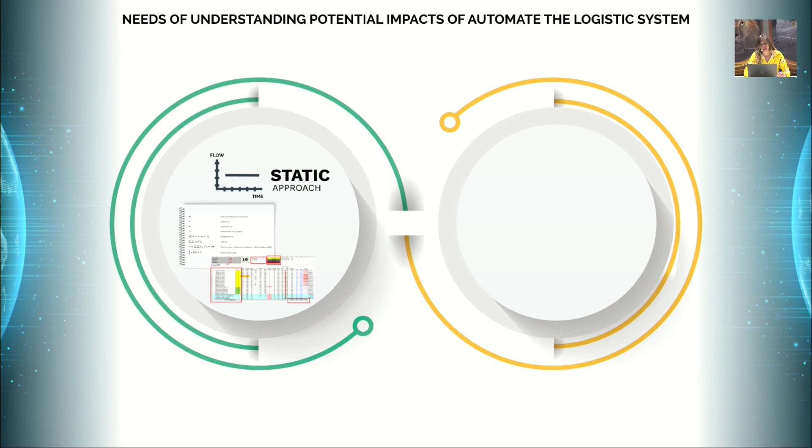When our customers, like you for example, come closer to the automation world, we know that the transition is not a straightforward path. We guide you to understand potential impacts on your logistics system. We base the analysis on historical data together with future forecasts, but the traditional mathematical approach, only based on static input data, may not be enough to gather the complete system behavior. Complex systems require an extra effort - they require to be studied with a flexible tool that highlights the Elettric80 know-how.

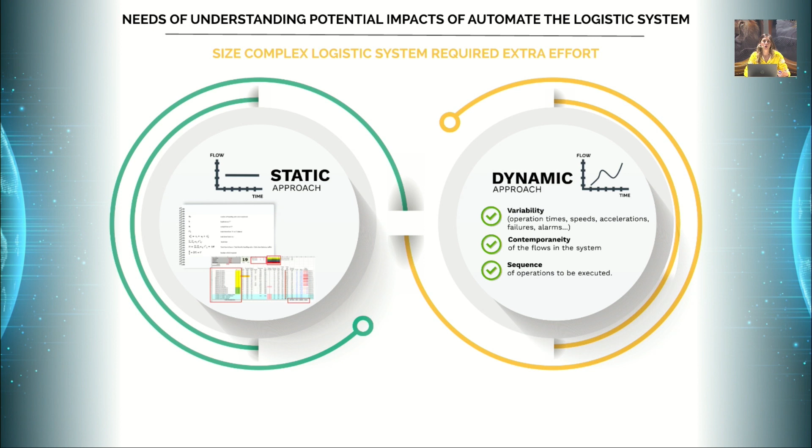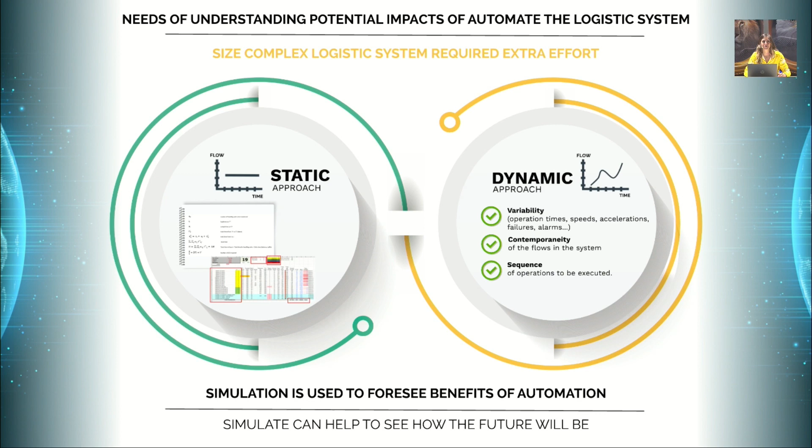This is the reason why we add a dynamic approach, where input data change throughout the simulation time and follow the real trend of the events affected simultaneously. Also, variability and sequence of the events are part of the analysis. The static approach is not intended to be an alternative way of sizing a system - the static inputs are a mandatory step, while the dynamics complement this approach. Through the simulation, we can foresee future benefits and take you through the transition between manual to automated. Simulation can help to see how it will be.

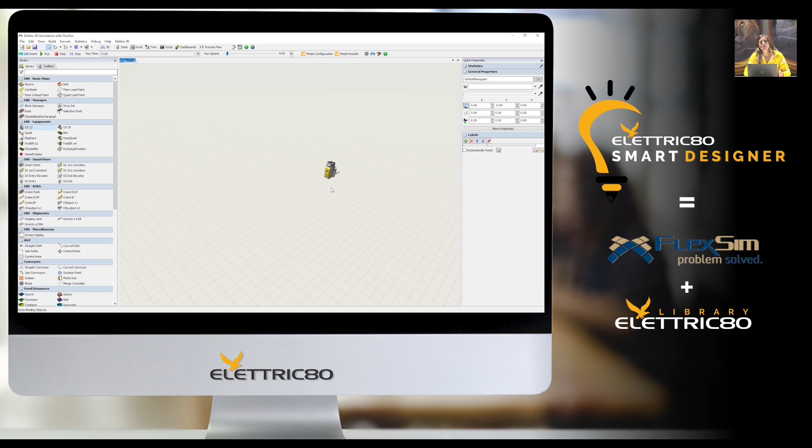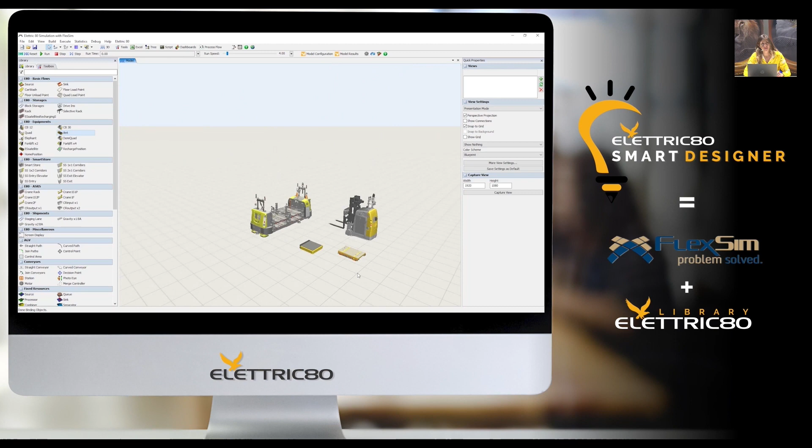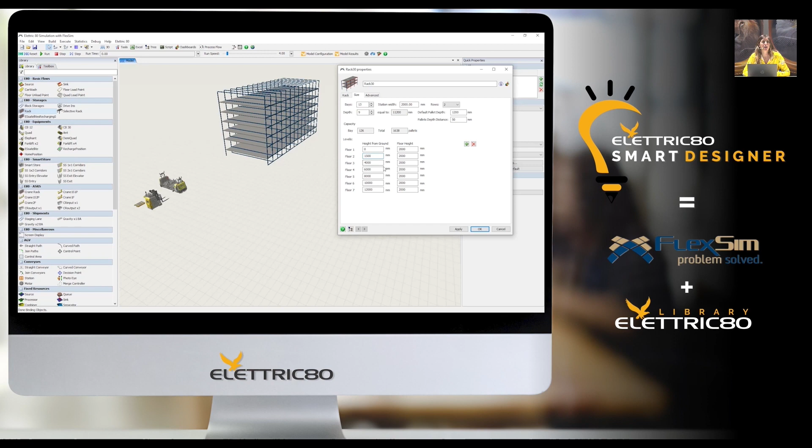This is Smart Designer, and this is the way we decided to call our simulator. Smart Designer includes specific libraries developed by E80 and E80 developers. These libraries function as the software does in the real system and as the system would in the real world. It uses FlexSim as the engine, but all the E80 know-how influences the current behavior. From the library, we can drag and drop objects on the virtual environment. We can import the AutoCAD layout and then place the objects at the real layout physical positions. We can also customize object parameters based on customer requirements through the user-friendly GUI or a custom code to behave as the customer is requiring.

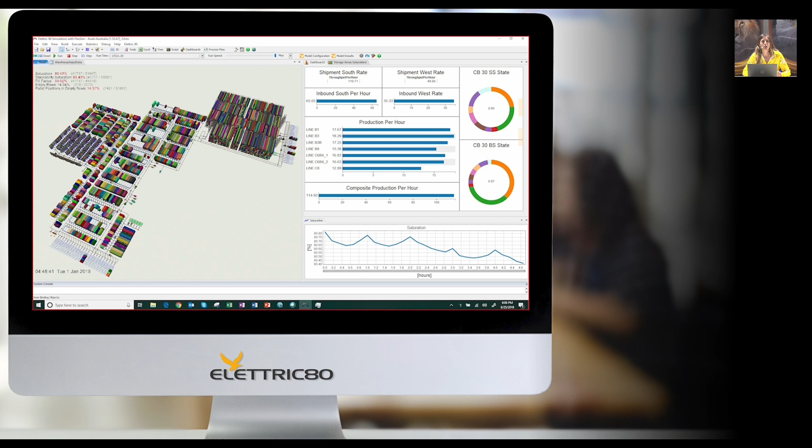Look at this example of a simulation, and look at the right side of the video - there are many dashboards and reports. For example, would you like to estimate what will be the real production per hour? Here are the histograms with the instant production per hour. Or would you like to estimate what could be the warehouse utilization? Here are the graphs with the warehouse saturation. At the end, would you, for example, want to monitor also the warehouse equipment utilization? Here are the pie charts with the status tools utilization.

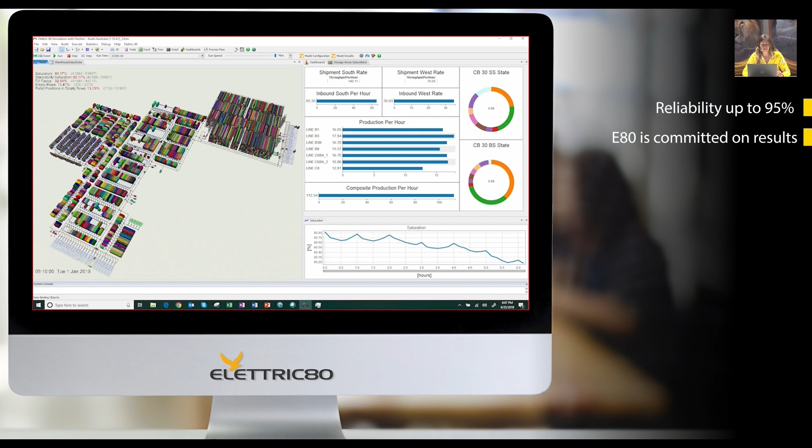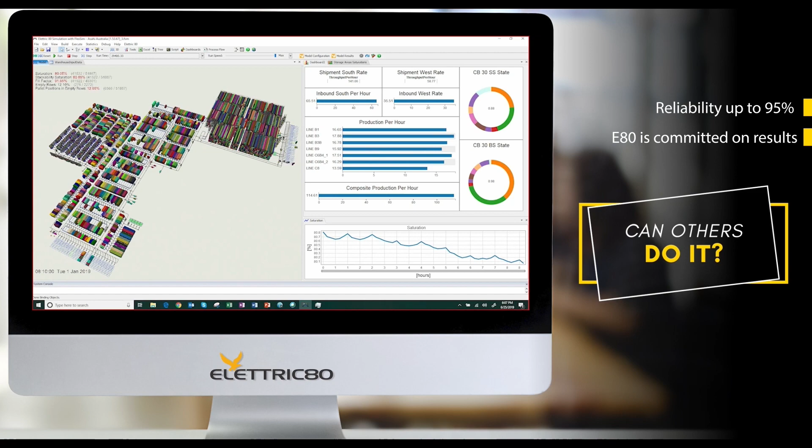Smart Designer provides reliable feedback with an accuracy up to 95%. We believe in the solution we offer you, and we are committed to the results. Can others do the same? With all due respect, I will explain the differences - why work with E80?

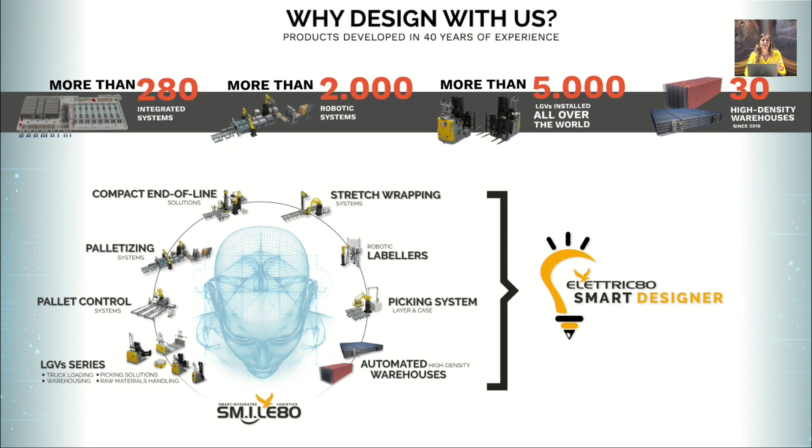Why design with us? When we developed Smart Designer, we decided to include all the best practices of the Elettric80 projects that characterize Elettric80 projects, and the lessons learned in 40 years of experience. As of today, we have more than 280 integrated systems, with more than 30 high-density warehouses and 5,000 LGVs already installed. So Smart Designer includes all this experience.

Of course, starting from the robots and the systems, the robotic systems, like for example LGVs, palletizers, and wrapping systems - their physical behavior, as well as the kinematic and dynamic aspects, are considered. We consider, for example, how an LGV does rotation or movements, how it lifts a pallet, or how, for example, a robot moves the anthropomorphic arm. E80 knows these aspects very well because we are the designers of all the equipment we supply.

Not only robot, but integrated automated solutions that include high-density warehouses like cranes or smart storage, and fully automated picking solutions with layer and case picking. But the simulator is not only a 3D environment where objects are moving.

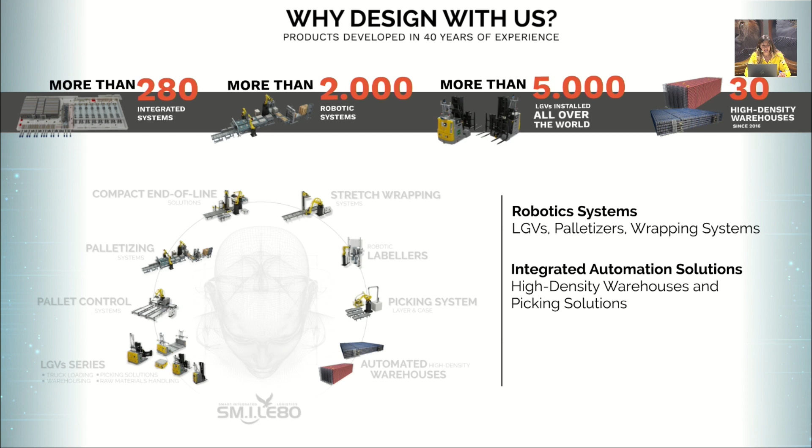The real differentiator is the SmilE80 software, the brain of the system. So we decided to replicate our SmilE80 software in Smart Designer, of course in a different architecture, in order to replicate its behavior also in simulation. So why put this logic in Smart Designer? Why replicate the WMS logic in Smart Designer?

Sizing a system doesn't mean only defining the best, the right number of LGVs to replace forklifts, or calculating the number of LGVs to move a certain number of pallets from A to B. It's the logic you apply that influences the results. This is why one of the main focuses of the Smart Designer simulator is the warehouse KPIs, the warehouse utilization and filling factor. We did it with a higher level of detail because we know that not going deeper in the simulation modeling creates a big gap in the resulting KPIs.

So doing it without being a designer or developer is very hard work, and this is the reason why many engineering companies often contact us to support them in achieving this goal.

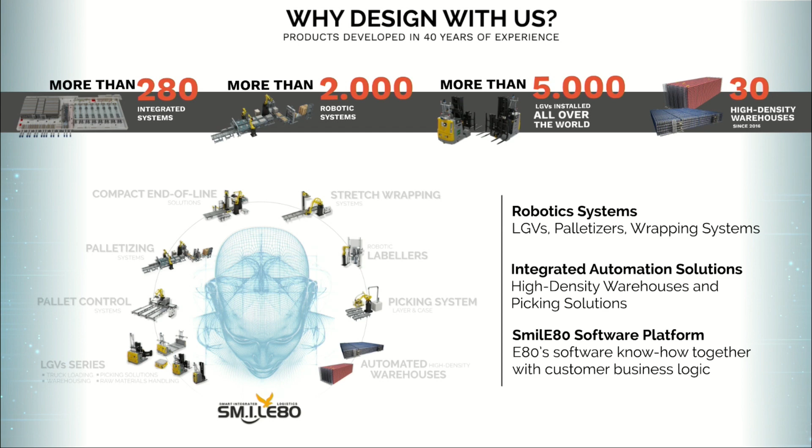So let's summarize the main KPIs that we can provide you. First of all, remember that we offer reliable KPIs based on solid experience and a deeply developed simulator. Properly sizing a system means giving you the right value and the right output. But even more important, we commit contractually to performance in the real installation.

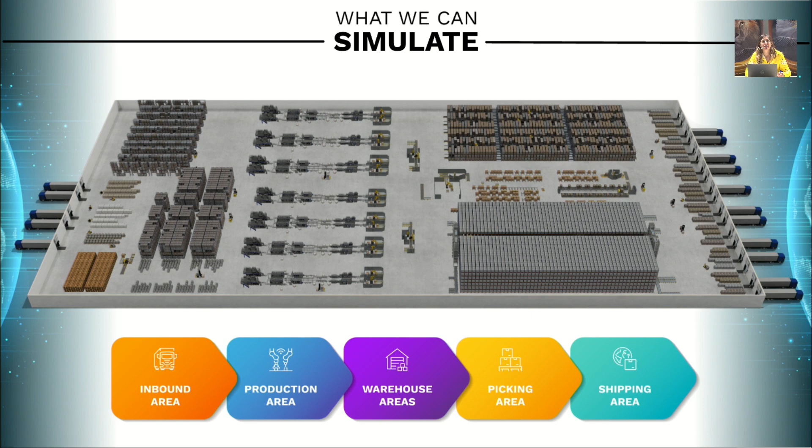To ideally represent what we can simulate, we decided to use this plant. It will work as an example like any kind of factory or distribution center. Indeed, we have different functions. We start from inbound, when we receive goods. We have production area, warehouse area, picking, and of course shipping. We now jump into every single function to see how this model has been built and see the KPIs that we analyze in different projects.

We start from the inbound. Goods inbound is here represented with an inbound conveyor. The inbound conveyor is used as a connection point between the operator activities in charge of truck unloading and the LGV activities in charge of storing goods. The simulation can be used, for example, to properly size the inbound conveyor capacity in order to keep a flowing inbound rate, but also to help the customer calculate the right number of operators required to unload received trucks. Based on the incoming flow, we can define different storage strategies of products, combining different scenarios of SKU mix.

We now jump into the production area. The production area may be represented with the end-of-line parts of the production lines, where boxes are coming into the palletizer solution and a pallet pattern is created. In Smart Designer, it's possible to create a realistic production plan, which may include all the information that is not possible to analyze with a static approach, like, for example, the list of SKUs per line and its batch length. The line speed is usually affected by SKU, but also by defining different setup times for the lines.

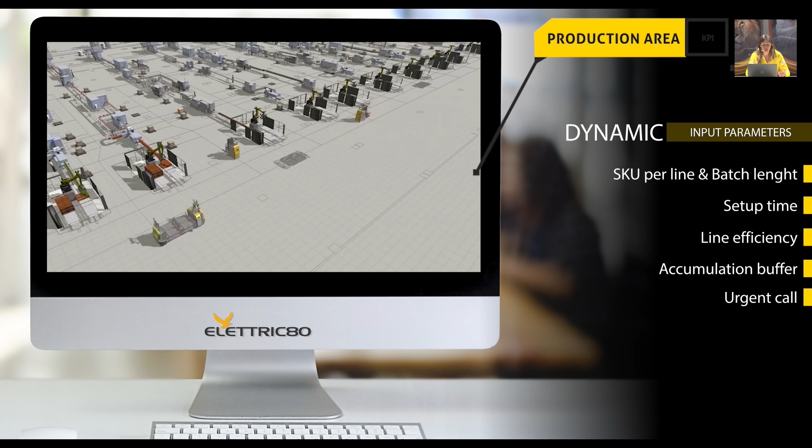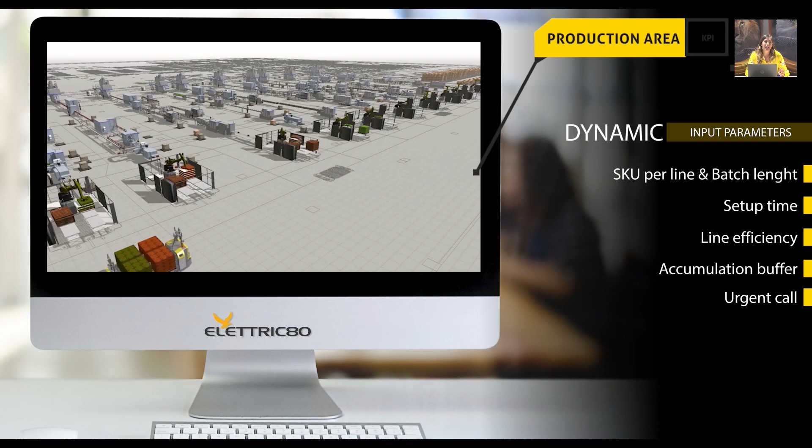And inserting different line efficiency. Also, the line efficiency may not be stable during the run. We can also analyze the accumulation buffer conveyor before the pickup points in order to detect possible congestion or line blocking due to accumulation, and of course, based on this, manage urgent calls. Therefore, you can understand that the overall production pallets per hour, generally considered a static input of the simulation, may become an output of the simulation.

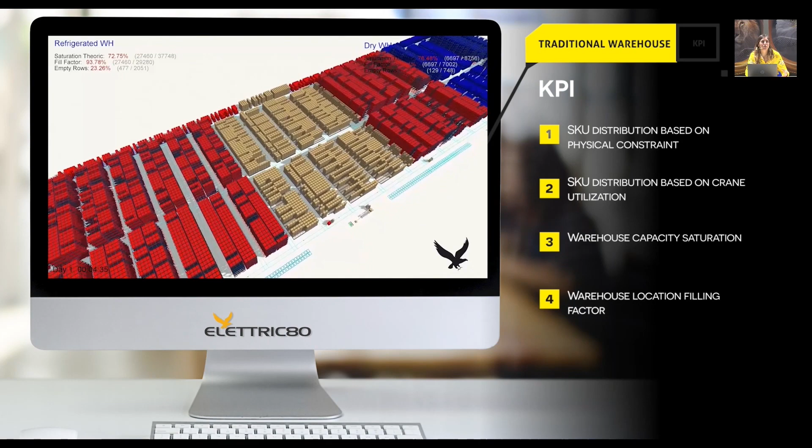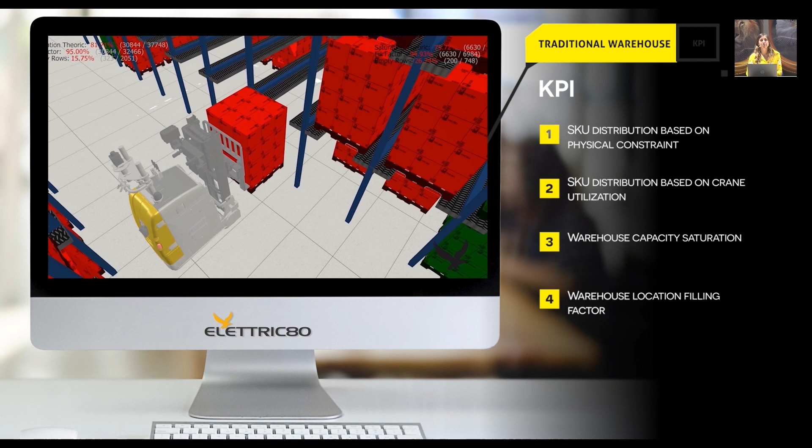We are now in the core of the system, the warehouse area. In our ideal layout, we represent different kinds of warehouse strategies. We can have, for example, block storage locations. We can handle products in all types of racks, from selective to drive-in. We can also manage racks equipped with satellites, but also automated warehouses like a standard crane system or smart storage, our EAT solution, multi-depth pallet solution.

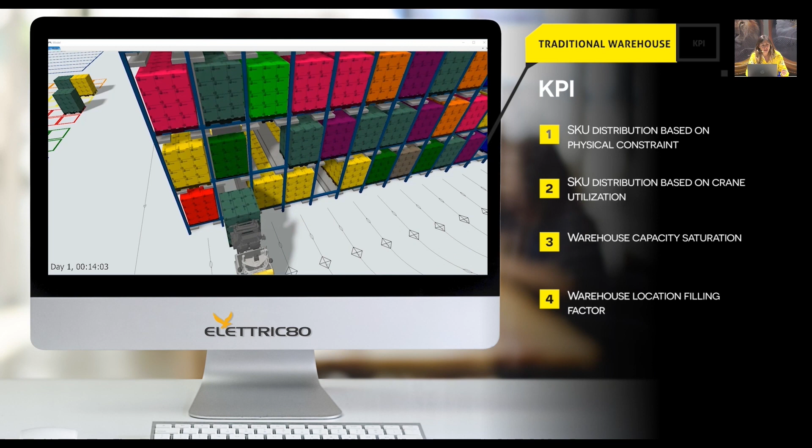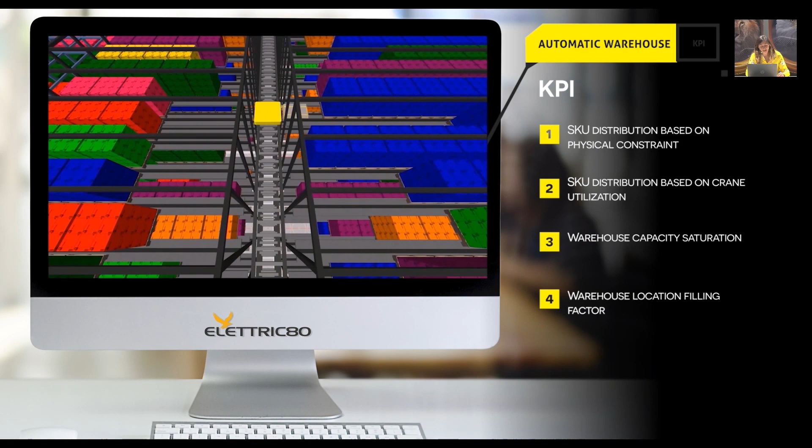So the simulation manages in real time the put-away logic, evaluating different warehouse alternatives, different warehouse possible destinations. Simulation means no need to predefine which percentage of the flow should be sent to one area or another in advance. Smart Designer will act as the real software does in the real installation, and of course make decisions based on the physical dimensions of the products and their intrinsic characteristics, mixing them with the real-time warehouse utilization and equipment utilization to then define the resulting warehouse KPIs and utilization factors.

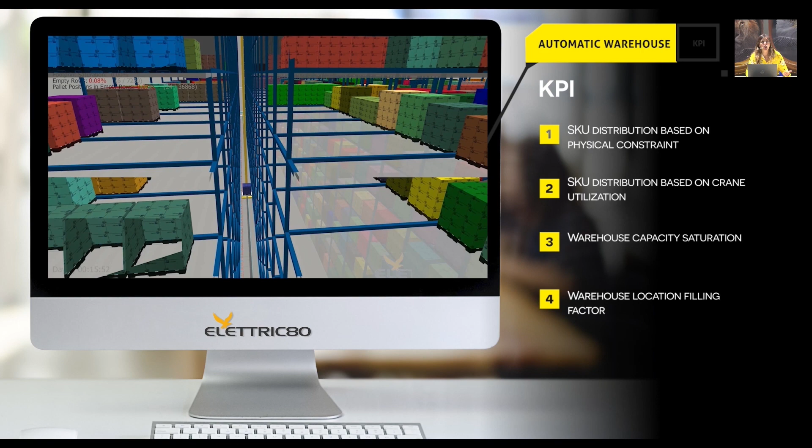The ultimate scope of the storage strategy is to optimize the warehouse and space utilization, but without forgetting equipment utilization and the optimization of automation, whether it's an LGV fleet or an automated system. Of course, any parameters and any rules that we set in Smart Designer, as they are input of the simulation, can be changed, giving us the opportunity to compare different scenarios.

We now go to the picking area. The picking flows and activities may include preparation where picking pallets are made up of only layer or only case, or can be the result of a combination of two activities.

Pallets can be pre-built in layer picking cells and then transfer to the case picking area to be completed with the additional cases. In this first part, we see the layer picking cells.

In the layer picking, we can simulate the layer picking robots and the number of cycles it is able to achieve. We can properly size the handling system. We can analyze the mother buffer.

Area, and consider if it's enough based on the concurrent SKU needed. And finally, considering the average pallet per layer distribution, analyze the average time to complete a pallet.

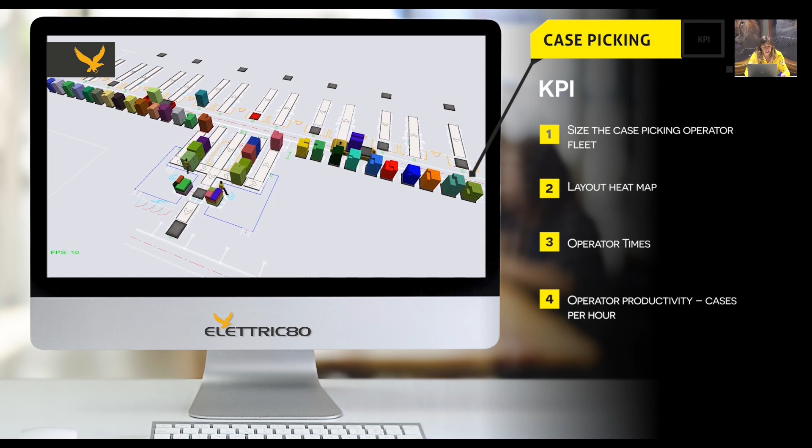But not only layer picking, also case picking. The operator can be considered a resource of Smart Designer, as an LGV. In the case picking, we can evaluate the operator fleet, estimate their productivity, and also consider the layout heat map and analyze the path most frequently traveled.

We are now close to the shipping area. Shipping is one of the most important activities in a plant. This activity can be performed in different ways.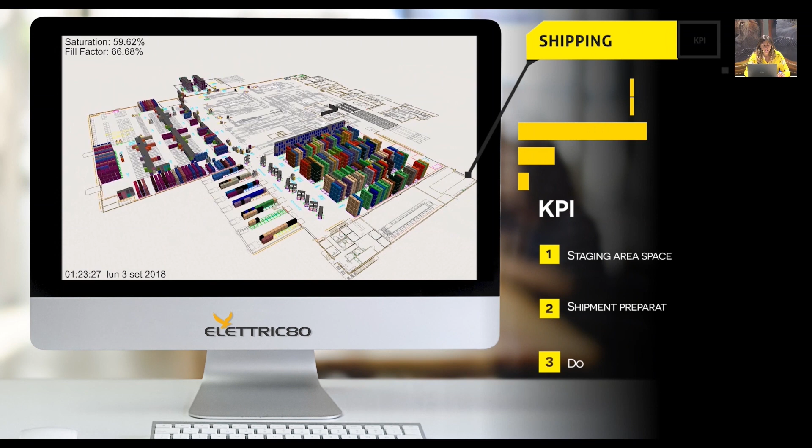Flows can be performed with shipment preparation, where we extract directly from the warehouse and pre-stage in a temporary area, or directly load onto a truck.

But just as we did for the production flows, also from the shipping we can create a realistic shipping plan, where we consider different dynamic parameters, like for example shipment dimension.

Trucks are not all equivalent in terms of dimensions. Also shipment composition in terms of SKU mix, but even staging sequence required by our customer, where our customer requires us to group pallets by delivery, or for example by SKU or other criteria.

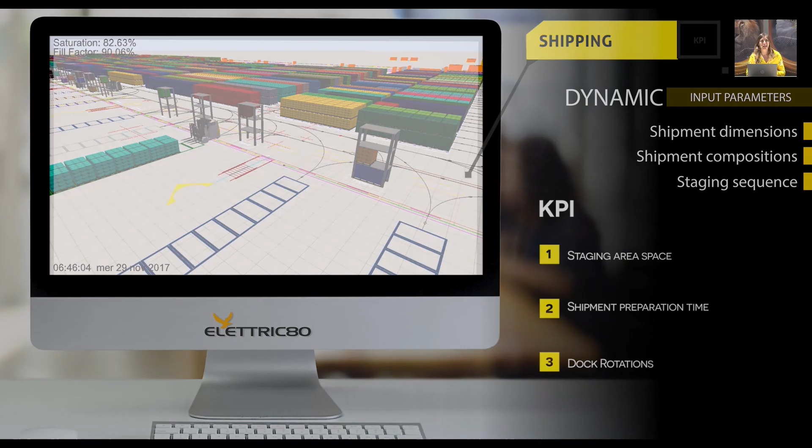Then the resulting KPIs we analyze allow us to define the space required for stage pallets, estimate the shipment preparation times, but even more important, analyze the dock rotation based on the average truck waiting time together with the loading operation.

Then we complete the flow, and this is a big example of a flow to be monitored. Of course, the aim of the simulation doesn't necessarily need to create such a big plant like the one we see today. Also, a small part of the warehouse, a critical area or bottleneck, can be considered the scope of the simulation too.

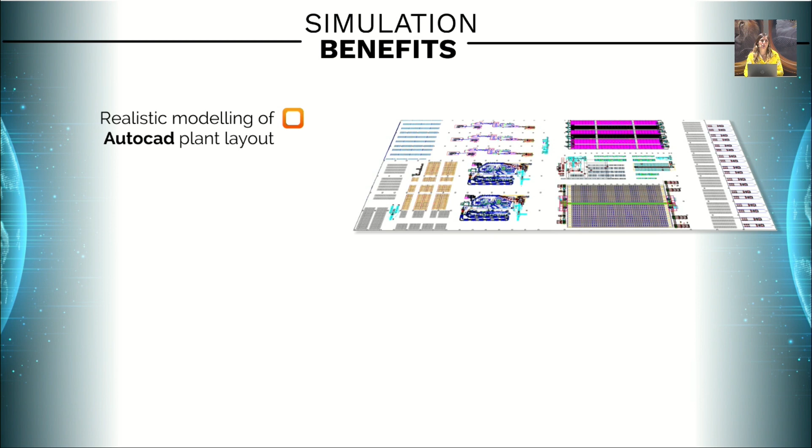So let's review now the key points of the simulation done with Smart Designer. First of all, we work using a realistic modeling of the AutoCAD plant. This means that space and physical dimensions are retrieved from the AutoCAD layout that can be easily uploaded on SmartSim.

The core of doing simulation is to evaluate the behavior of a system in a protected environment. That's why one of the main goals is to create and compare different scenarios, changing one or more variables.

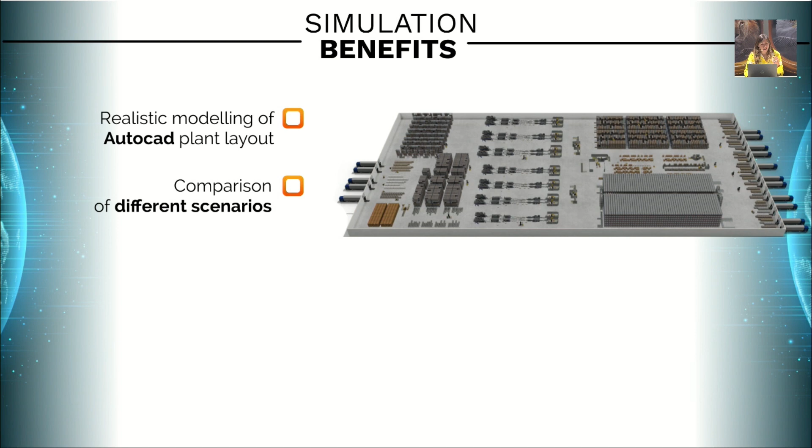For example, one variable can be evaluating alternative layouts, moving warehouses from one side to the other, or changing the warehouse configurations. We can also set different flow configurations, or we can consider different what-if scenarios.

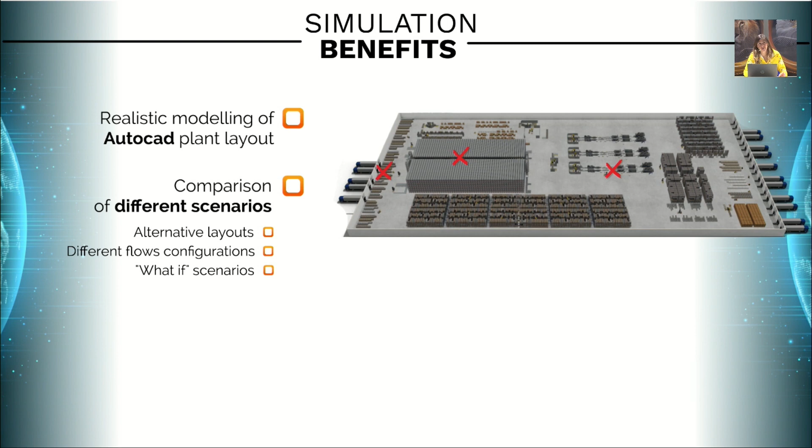Like for example, what happens if one sector of the warehouse is not available? Or what happens if the line runs at maximum speed? Or what happens if, for any reason, trucks don't arrive for many hours? All those questions can be answered through the simulation results.

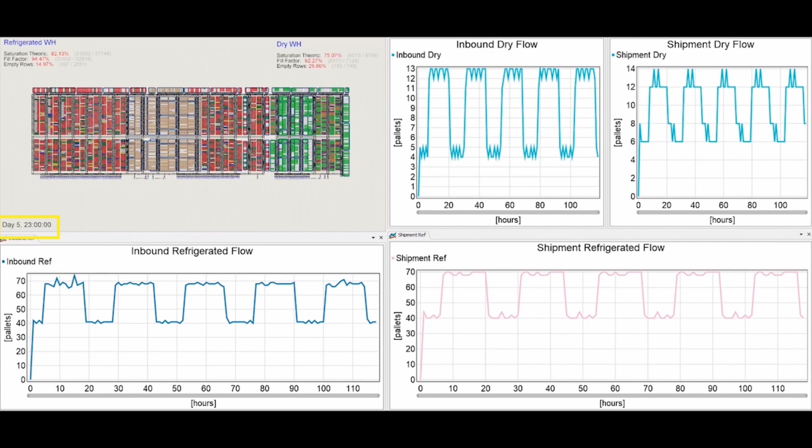Another advantage is that by design, Smart Designer doesn't follow the real-time flow of events. Look at the clock, look at the speed of the simulation, and you can understand that we can simulate a long period of time in a short real time. For example, doing a simulation along an entire year in a matter of minutes.

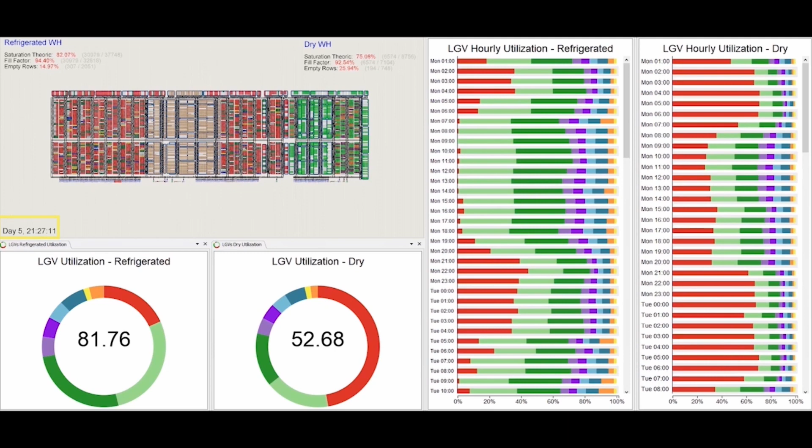But also, as you can see on the right, Smart Designer has a built-in reporting tool that can be customized to create specific dashboards and charts. Some KPIs can be observed in real time, and others can be analyzed at the end of the simulation.

But even more important, the main KPIs that Smart Designer provides through the simulation also reflect, in the calculation method, the same way that the reporting tool calculates for the real installation. So that's why you will read results in the system design in the same way you will use when you drive the automated system.

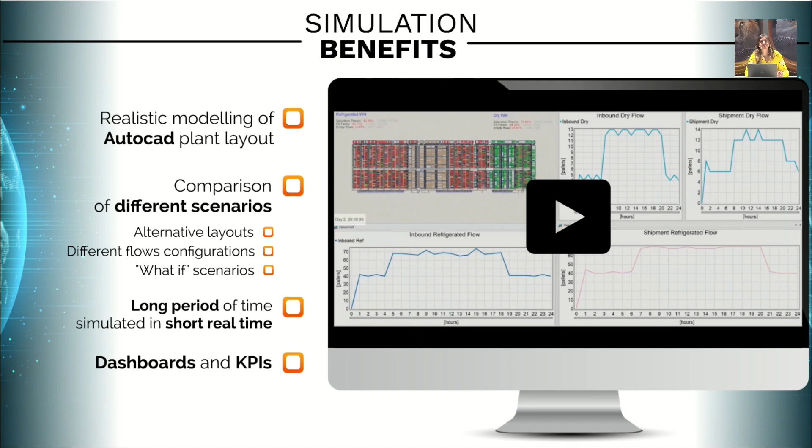We want to leave you with these three takeaway points. First, with this tool we can evaluate and verify the performance of the overall project, providing contractual guarantees that we are able to commit during the life of the project.

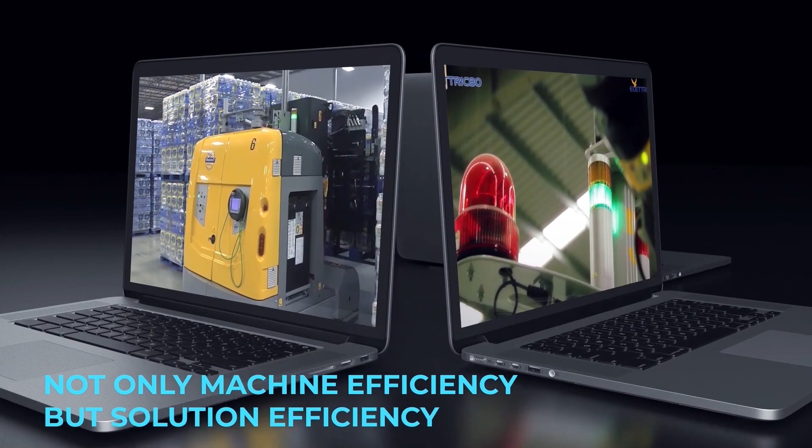Elettric80 commits not only to the efficiency of a machine, but we want to guarantee an integrated and automated solution. Smart Designer is a vital tool to achieve maximum customer satisfaction.

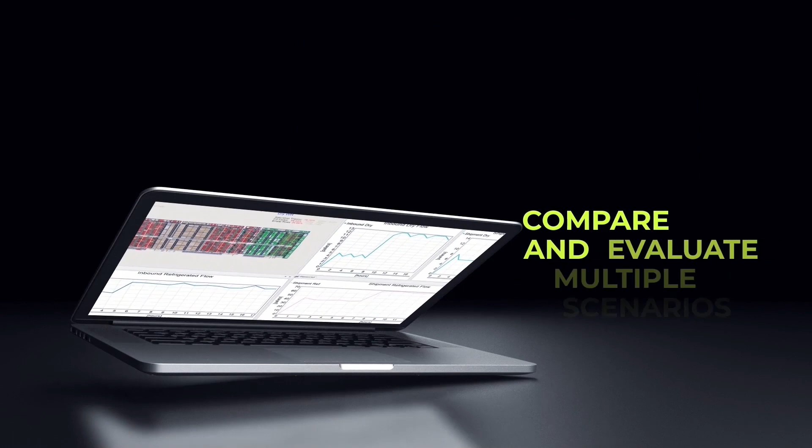The second point is that this is a time-saving approach, because running simulations to evaluate and compare different functional behaviors of a system allows you and your technical office to save precious time during the design and development of the project.

Going straight forward to the best possible solution, with Smart Designer you can experiment in a safe environment before making any investment in equipment and with no impact on daily operation. You can use it in the future to test different operational scenarios.

With Smart Designer, the benefits continue after the initial investment is made. No risk, huge benefits. The only risk is not doing it.